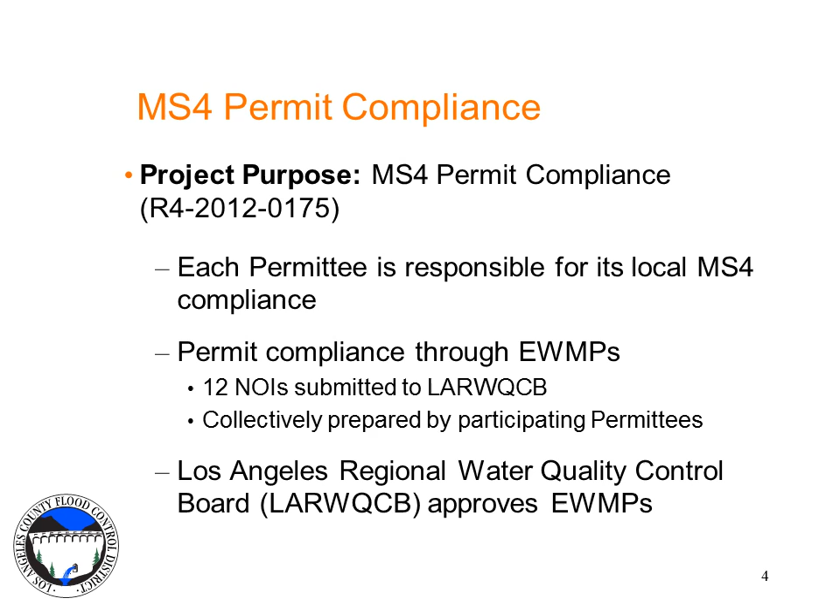The Enhanced Watershed Management Program, or EWMP, provides for the collaboration among agencies across the watershed to promote more cost-effective and multi-beneficial water quality improvement projects to comply with the MS4. It also allows for the development of watershed-wide programs that will increase water conservation and remove or reduce pollutants from the urban runoff in a cost-effective manner.

Enhanced watershed management programs will be implemented in 12 defined EWMPs. Each of the 12 EWMPs will be preparing an EWMP plan that will identify watershed control measures such as structural best management practices, BMPs, or non-structural BMPs to meet the overall water quality goals.

Each EWMP will also be conducting a reasonable assurance analysis. The reasonable assurance analysis is conducted using a model that assesses the effectiveness of the implemented and planned BMPs to meet the overall water quality goals. It essentially answers the question, will the watershed control measures defined in the EWMP plans meet the pollutant reduction and water quality goals required in the permit, as well as in total maximum daily loads, or TMDLs, for each watershed.

The EWMP plans also provide priority ranking of pollutants to allow for the effective use of resources, and they also define who will be implementing each of the watershed control measures as defined in the plans.

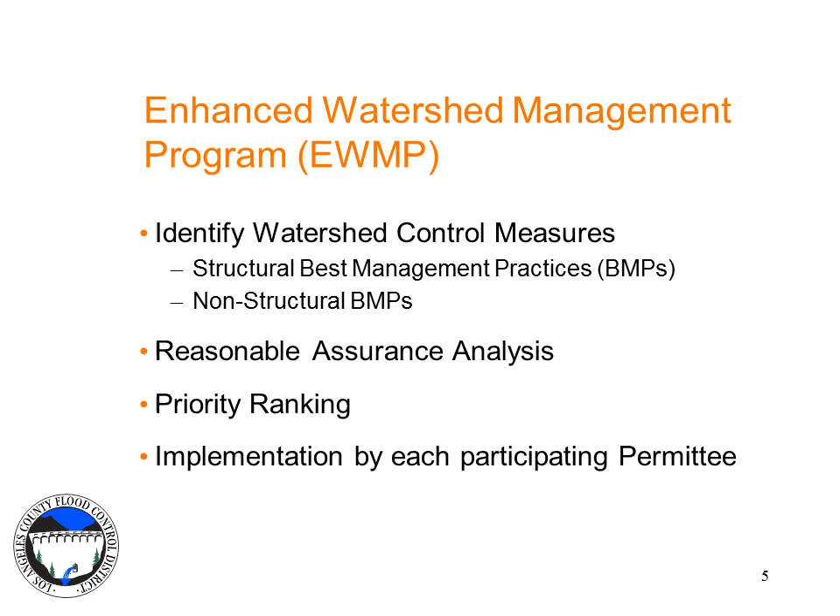They include the Ballona Creek, Beach Cities Watershed Management Group, Dominguez Channel Watershed Management Group, Malibu Creek Watershed, Marina del Rey, North Santa Monica Bay Coastal Watersheds, Palos Verdes Peninsula EWMP Agencies, Rio Hondo San Gabriel River Water Quality Group, Santa Monica Bay Watershed Jurisdictions 2 and 3, Upper Los Angeles River Watershed, the Upper San Gabriel River, and finally the Upper Santa Clara River Watershed.

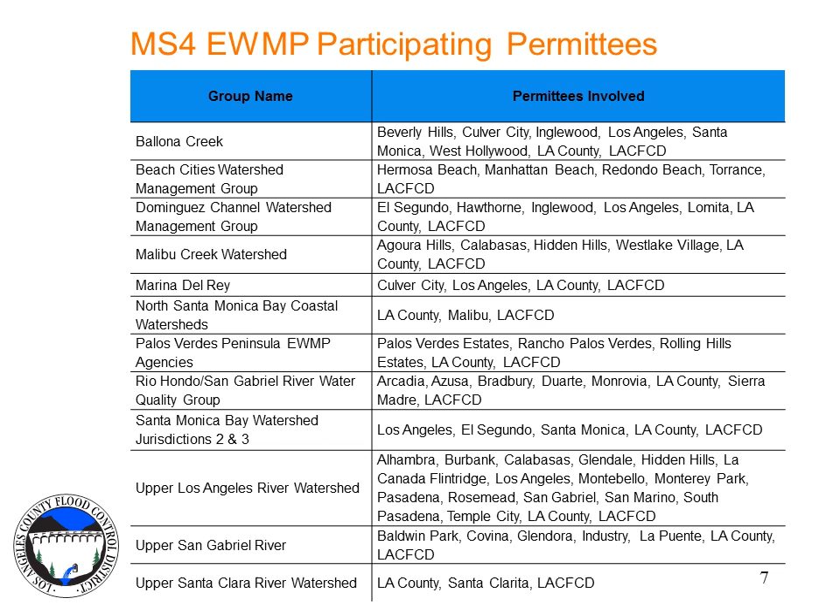The Program Environmental Impact Report, PEIR, is being prepared in accordance with the California Environmental Quality Act, or CEQA, which has 3 key elements. Disclosure. The CEQA process provides for the identification of impacts to the environment due to the proposed project, in this case, the EWMP, which is the Enhanced Watershed Management Program. The PEIR will provide analysis of the potential impacts from this overall project at a program level.

CEQA also provides through the PEIR a decision-making tool. This report will inform the public and decision makers about the potential environmental impacts associated with the implementation of the project. And finally, it will identify mitigation. Where there is a significant impact identified, it will identify ways to avoid or reduce those potential impacts. Further discussion of the CEQA process will be provided later in this presentation.

Why is the Los Angeles County Flood Control District leading this Program Environmental Impact Report, or PEIR, for the EWMP? First, the Los Angeles County Flood Control District operates and maintains flood control facilities in all the 12 EWMP groups. The Flood Control District also has a vested interest in increasing opportunities for stormwater capture and groundwater recharge. One of the missions of the Flood Control District is stormwater conservation, which is consistent with these projects that capture stormwater and recharge it into local groundwater.

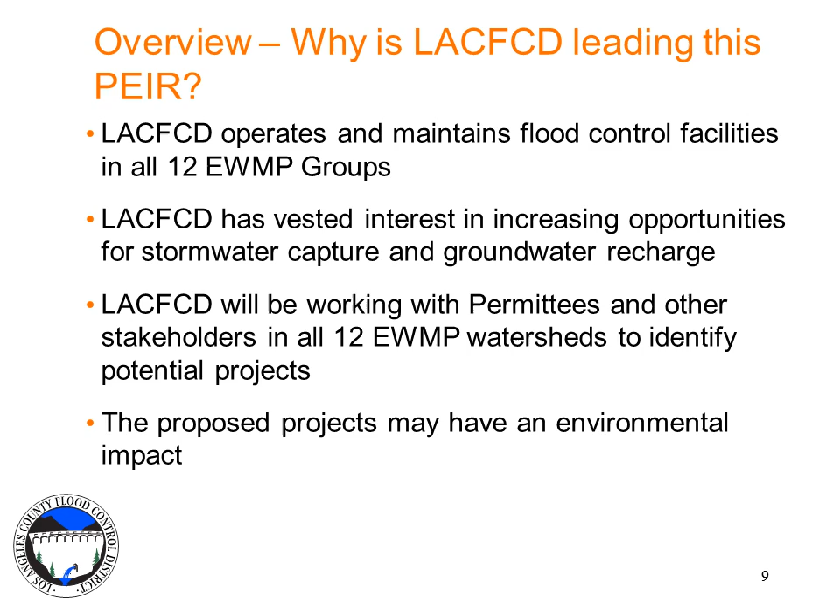An important aspect of the EWMPs is that they will be implemented by each permittee within their own jurisdiction, and each permittee is responsible for compliance of their MS4 discharges within their jurisdictions. The EWMPs do provide an opportunity for cooperation and collaboration among the permittees for larger projects. However, the responsibility and implementation of each of the projects will depend on the type of project being implemented.

These will be defined in the EWMP plans with regard to the role and responsibility of each permittee in the implementation and operation of the projects. Therefore, as defined in the PEIR, each of the permittees is defined as an implementing agency, and they will vary depending on each individual EWMP project.

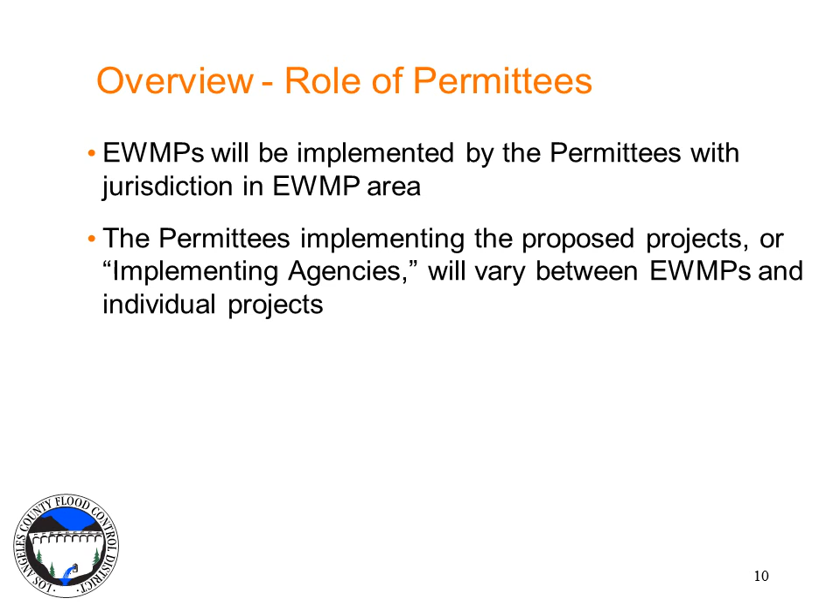The proposed project objectives are the achievement of water quality performance goals through the implementation of the Enhanced Watershed Management Program. The implementation of the EWMP will meet regional compliance with the MS4 permit through the coordination and implementation of the compliance strategies and specific projects defined in the EWMP plans that are currently being prepared by the 12 EWMP groups. In each of these plans, the watershed-specific compliance strategies are defined with the specific projects and schedules to implement these projects.

The EWMP provides for environmentally responsible opportunities that include the implementation of not only water quality benefits, but also other benefits that include flood control, water supply, and habitat.

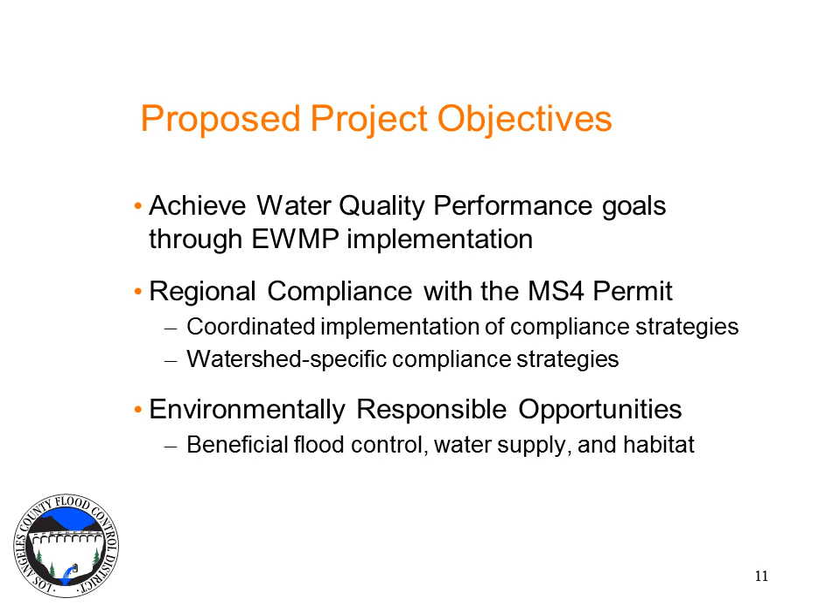The proposed project, or the EWMP, includes the implementation of watershed control measures. Watershed control measures may include structural BMPs or physical control measures that generally consist of these three elements: infiltration, water quality treatment, and storage. The examples that are shown on this graphic demonstrate each of these different functions.

The first one includes the storage and containment of stormwater that is then allowed to infiltrate and recharge the groundwater. The middle graphic shows the storage and containment first of the stormwater that is then filtered through a treatment wetland system or a multimedia filter that is then collected in an underdrain system and either discharged to the receiving water or back into the MS4 after this treatment.

The third example below shows the temporary storage of stormwater that allows for large debris and trash to settle out as well as sediment prior to the discharge back to the MS4 or the receiving water. There are three categories of structural BMPs that are presented in the Program Environmental Impact Report, PEIR. These include regional, centralized, and distributed structural BMPs. Each of these categories will be presented in more detail in this presentation with examples. Watershed control measures can also include non-structural BMPs.

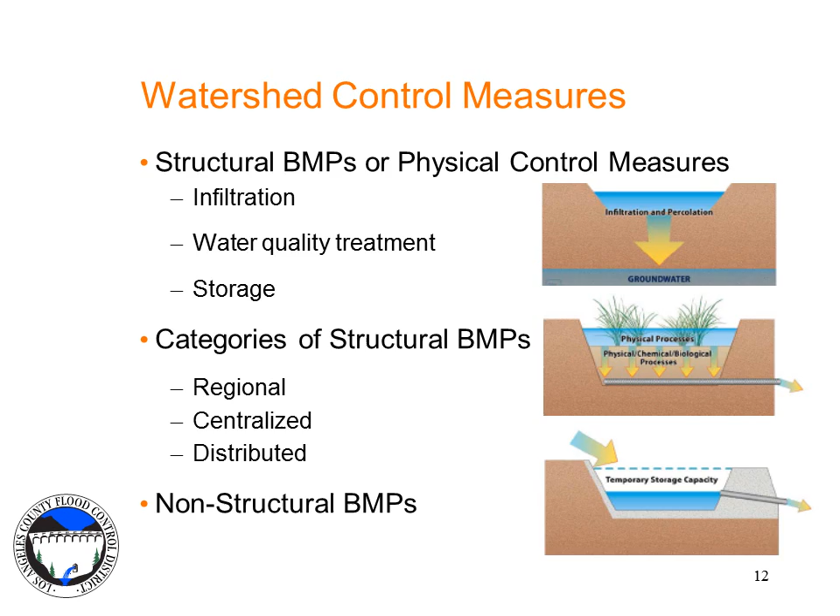Regional EWMP projects. Regional structural BMPs are unique in that they must retain on-site all the runoff from the 85th percentile 24-hour storm event for a tributary drainage area. The 85th percentile 24-hour storm event is statistically derived and is equal to approximately 0.75 inches rainfall in the LA region. What this means is these projects must retain on-site all storms 0.75 inches or less, and must either then retain and infiltrate that to recharge local groundwater, or it must retain and then use that stormwater in a beneficial manner.

Because of the required size, these projects are typically on public lands with open space and may include parks, large parking lots, or vacant space. They may either be above ground retention basins or below ground vaults that then allow for infiltration of this contained stormwater or use in a beneficial manner.

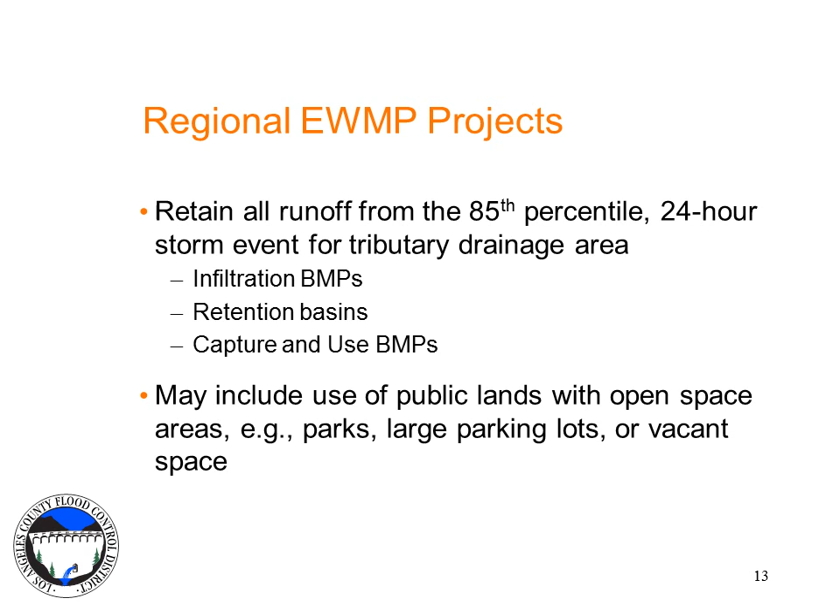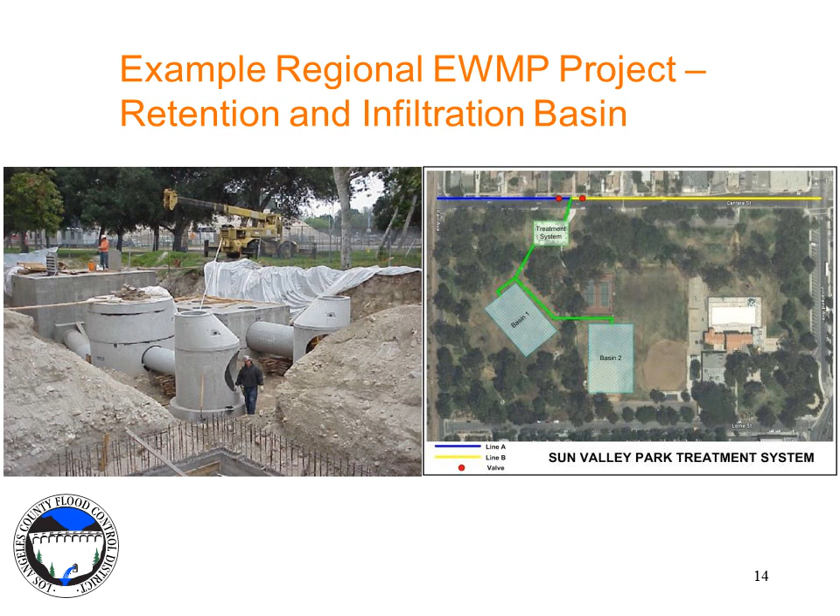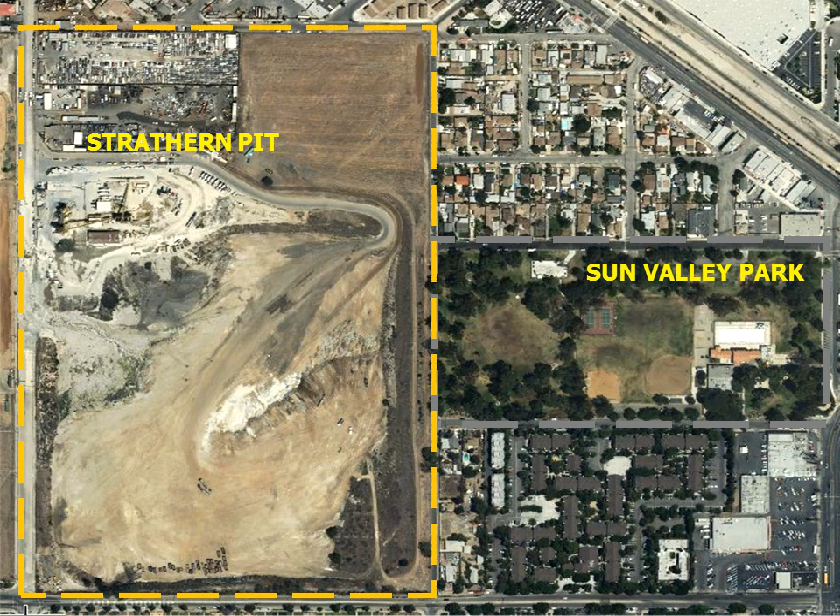Shown here on this slide is potential expansion of the Sun Valley project to the left. This expansion would allow for additional retention of stormwater and infiltration as part of a larger regional project. Depicted here conceptually is the expansion of this project to include large retention areas of stormwater, which would allow for more capture and storage that could then be directed to the underground vault system that is already in place to allow for additional recharge to the groundwater. These projects provide for additional benefits that include flood protection, recreational improvements, and habitat restoration.

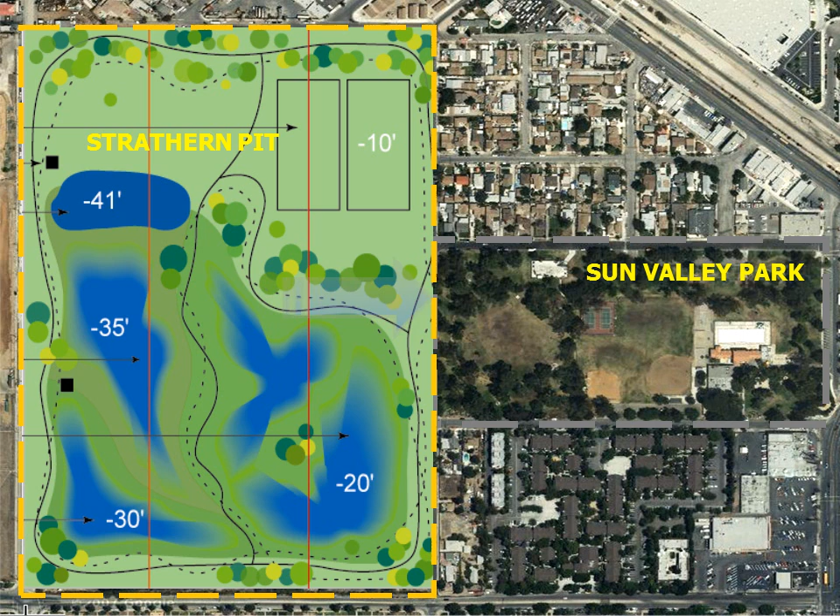Centralized structural BMPs are constructed structural practices intended to treat runoff from a contributing area, generally of multiple parcels. Because these projects collect stormwater from larger drainage areas, they're generally installed on larger public parcels and adjacent to storm drain outfalls or receiving waters. Examples of centralized structural BMPs include biofiltration BMPs, constructed wetlands, treatment BMPs with low-flow diversions, and creek and river restoration projects.

Centralized structural BMPs differ from regional structural BMPs in that they do not have to retain on-site the 85th percentile 24-hour storm event. They may therefore use filtration and other treatment processes and then release that smaller retained storm event back into the MS4 or to the receiving water.

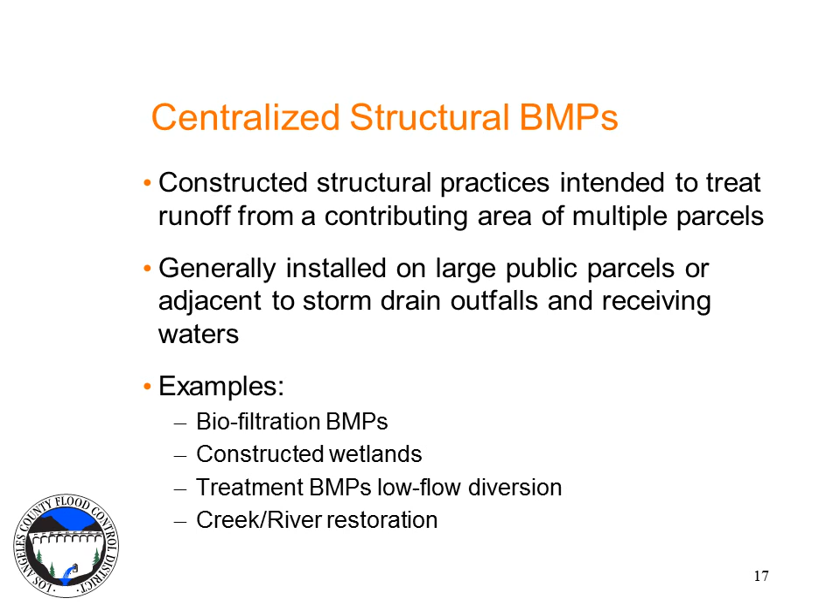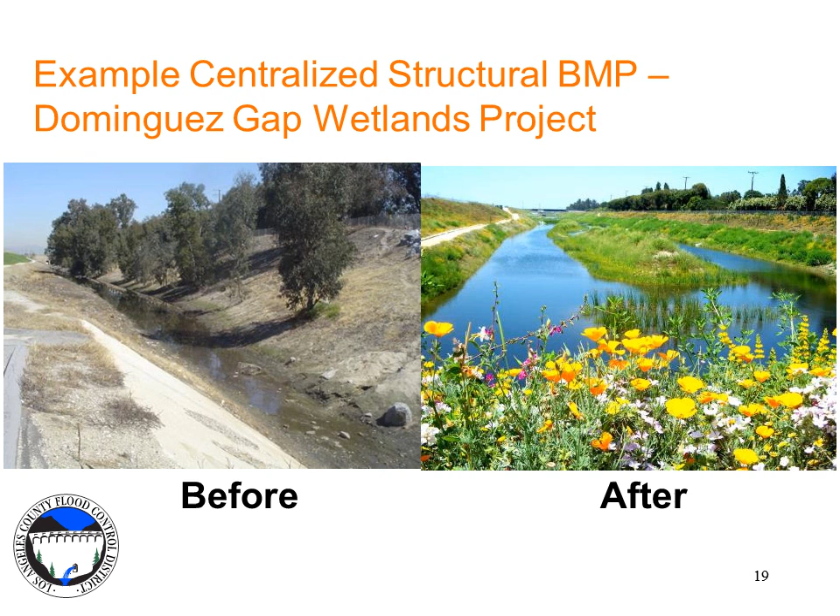Another example of a centralized structural BMP is the Marie Canyon Low Flow Diversion Project located near Pepperdine University. This project diverts dry and low flow storm events and treats them prior to being discharged back to the MS4.

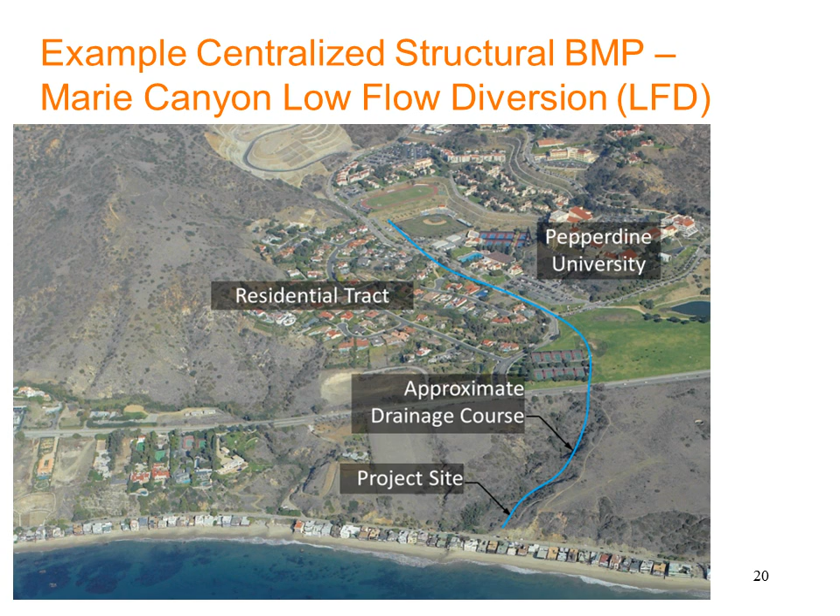The third type of structural BMPs are distributed structural BMPs. These are BMPs that treat runoff close to the source and are typically implemented at a single or a few parcel level. As the name indicates, these BMPs are distributed typically throughout the urbanized environment, which replace impervious surfaces with pervious surfaces as part of a low-impact development approach to reducing pollutants in stormwater. Examples of green infrastructure low-impact development distributed BMPs are listed here, and they include bioinfiltration, bioretention, bioswales, green streets, rainfall harvesting, and planter boxes, among others.

Distributed structural BMPs may also include flow-through treatment BMPs. These are typically installed within the MS4 system and may include media or filter cartridges installed within catchments that collect, treat and filter stormwater within the MS4. Distributed structural BMPs may also include source control treatment BMPs that are installed again generally within the MS4 system and may include catch basin inserts and screens for trash, gross solids removal devices, and hydrodynamic separators which remove large debris and sediment from stormwater prior to it discharging back into the MS4 system.

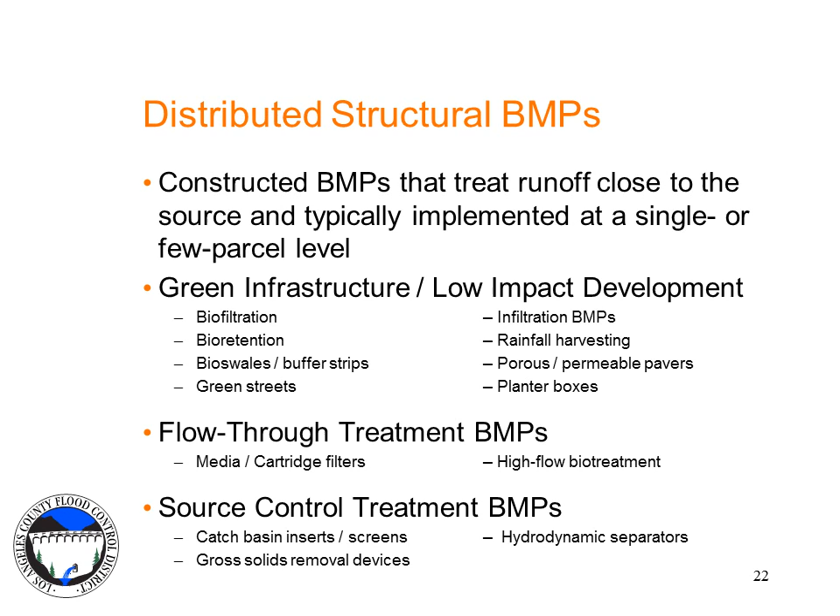Examples of distributed structural BMPs are shown here in these three figures. The first one in the upper left shows a detention basin constructed adjacent to a highway or road system that will retain stormwater for a short period of time, allowing for the settlement of large solids, debris, trash, and sediment prior to discharging back to the MS4.

Another example of distributed structural BMPs, as shown to the right, is a bioretention or biofiltration area adjacent to a roadway or parking area that collects stormwater from these impervious surfaces and filters it through soil or a filter media that is then collected in an underdrain system below the media and then returned back to the MS4 or discharged to receiving water. Distributed structural BMPs may also include rainfall harvesting in cisterns or rain barrels, or the use of green roofs to allow for the collection, filtering, and reuse of stormwater as part of the overall green infrastructure.

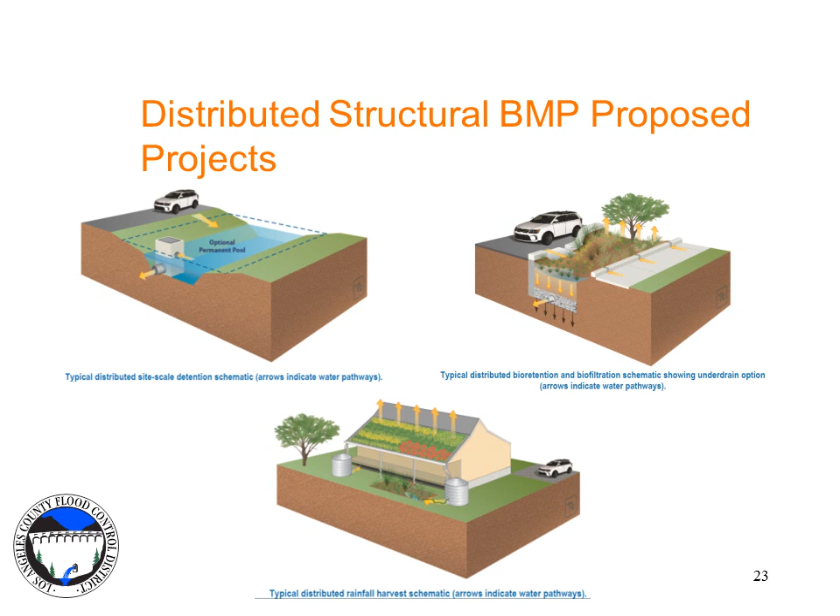Shown here is an example of a distributed structural BMP in the Valinda Greenway project, which was completed in 2009. At this site, an existing flood easement was used to increase stormwater filtering and infiltration by replacing low permeability soils with a bioswale and a deep rock swale that allowed for the collection, filtering, and infiltration of stormwater. This improved water quality as well as provided benefit in recreation and beautification of this community area.

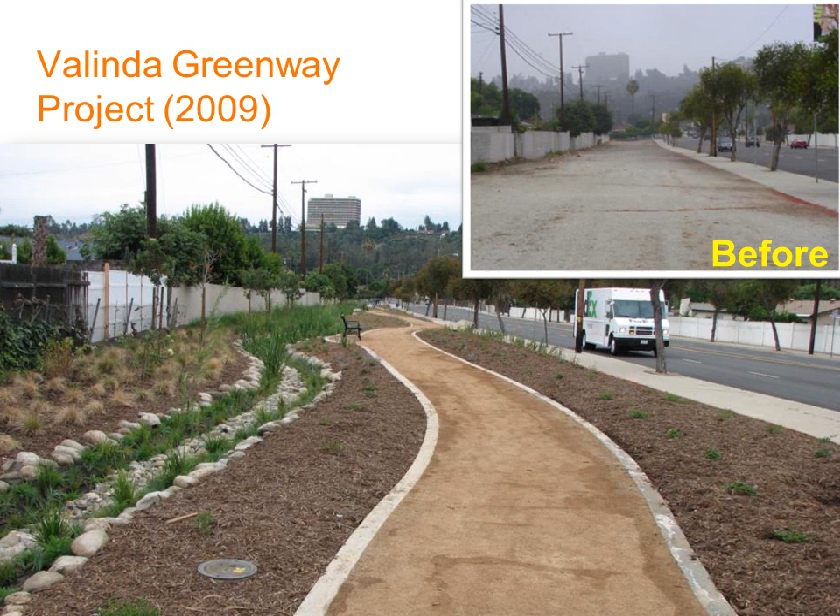Non-structural BMPs are also part of the EWMP implementation. Non-structural BMPs, as the name implies, are not typically constructed BMPs, but they are activities or programs that reduce pollutants at the source or address behaviors that result in pollutant loading activities. They help to prevent and reduce runoff as well as pollutants at the source.

Examples of non-structural BMPs include irrigation controls to reduce runoff, covering of trash receptacles to reduce potential trash and bacteria loading to stormwater, replacement of brake pads and lead wheel weights, which may add to the loading of metals into stormwater, pet waste cleanup stations, which address bacteria loading in stormwater, street sweeping, which addresses sediment and other constituents into stormwater, catch basin cleaning, and downspout disconnect programs. Non-structural BMPs are important in the overall implementation of the EWMP and meeting the overall water quality goals.

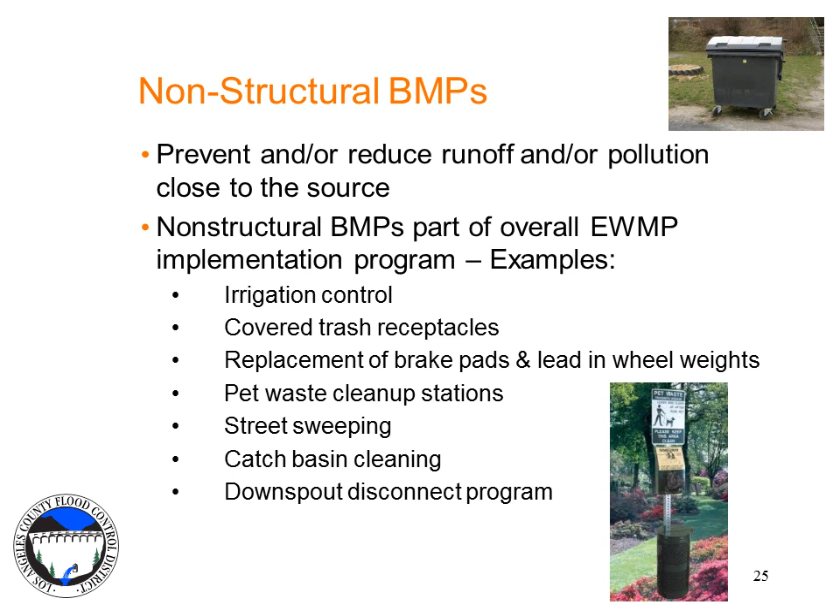The Program Environmental Impact Report for the EWMPs will be performed at a program level. This program level assessment will be submitted by the LA County Flood Control District to the LA Regional Water Quality Control Board, who is the responsible agency for approving the EWMPs. A program level assessment is used to evaluate a plan or program that has multiple components or actions. As the EWMP is a program with multiple activities defined in the watershed measures under each of the plans, this program level assessment is applicable to the EWMPs. The PEIR for the EWMPs will therefore focus on the effects of implementing the overall program. Individual projects will be reviewed as they are further developed to determine what, if any, further review under CEQA will be necessary.

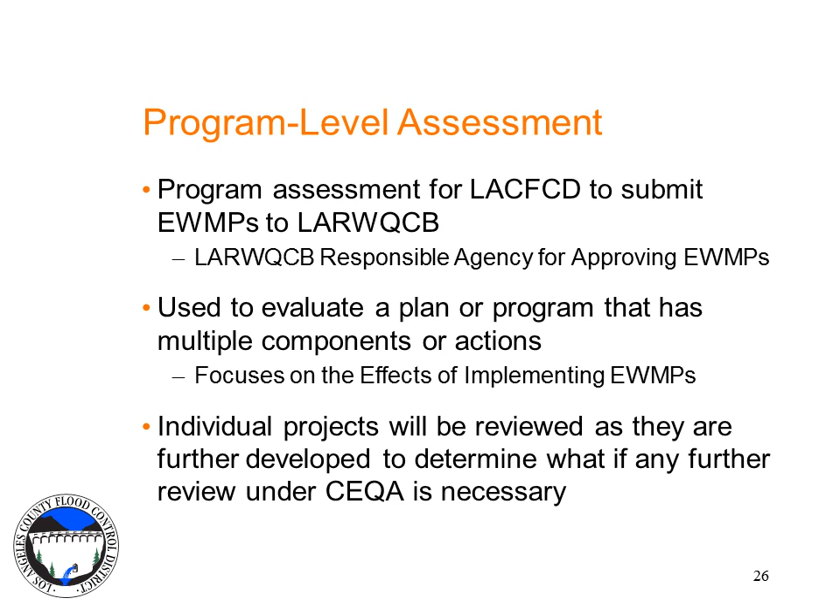Shown here is the CEQA process for an EIR and the opportunity for public review and comment. We are currently in the first step of initiating the scoping process. The notice of preparation has been provided and the comment period for the NOP has been extended to October 29th. We encourage comments from the public and we'll provide contact information at the Flood Control District to provide your comments.

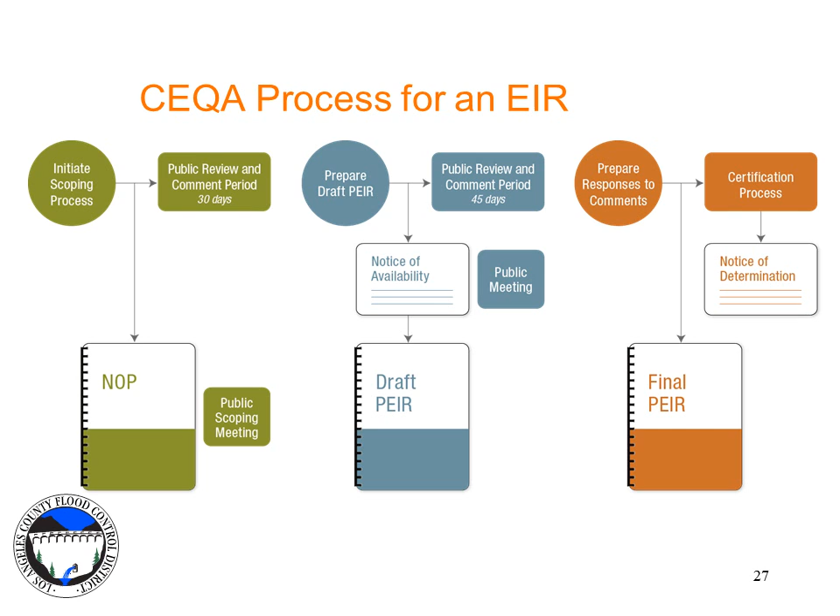Following the NOP is the preparation of the draft PEIR. The team is currently preparing the draft PEIR, which will then be published and a notice of availability provided to the public. At that point, a series of public meetings will be held and a public review and comment period will be allowed during a 45-day period after the draft PEIR has been made available. Comments from the draft PEIR will be responded to, and these responses along with the comments will be provided in the final PEIR prior to a certification process for this document.

We will be holding public review meetings to encourage and receive comments on the draft PEIR. In March, final responses to the comments will be prepared and a final PEIR will be compiled with the responses to these comments. In April, the final PEIR will then be submitted to the Board of Supervisors for consideration of the project approval and certification of the PEIR. As mentioned previously,